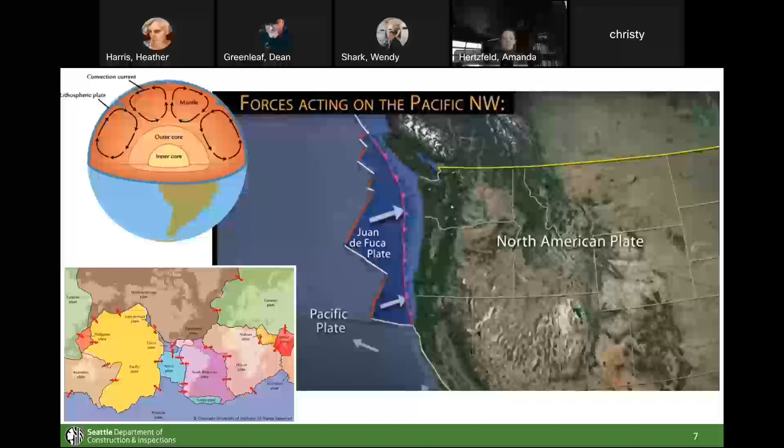And that being pushed underneath is what causes the subduction zone, that really big earthquake, the big one that they talk about. In that tectonic setting, you can have an earthquake happening right at that point of friction where those two plates are coming together. That's your megathrust event, the Cascadia subduction zone scenario.

Just really quickly, those megathrust earthquakes, the Cascadia scenario, the big one, we have between a 10 and 33% chance of experiencing that earthquake in the next 50 years. So relatively low probability, but we also know it can happen.

The last earthquake happened in 1700 on that fault source, and we know that those earthquakes happen between every 250 and 500 years. So it could happen this afternoon, or it could happen 150 years from now. The point being, we have a lot of geologic evidence that says it will happen again, and it's really important that we take appropriate measures to be ready for when that does happen.

The Nisqually earthquake was a deep earthquake, happening on the part that's more subducting, that is lower. We have an 86% chance of that happening in the next 50 years, so that's a really high probability. We want to make sure that our buildings in the city are ready for shaking associated with that type of event, because it's very likely that will happen again in the near future.

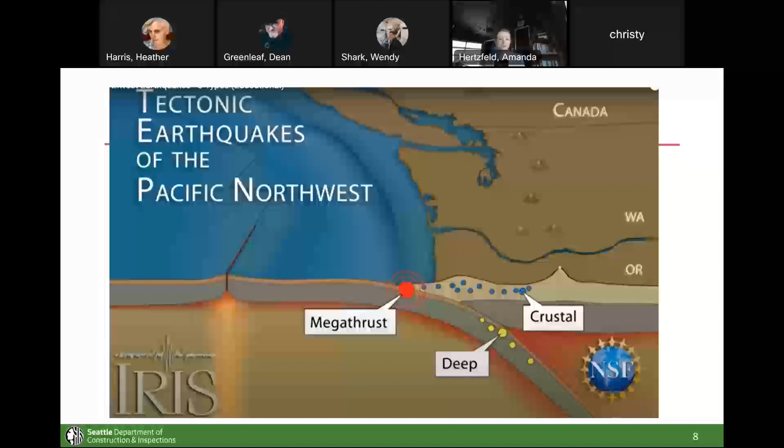I wanted to spend just a moment and talk about the difference between magnitude versus intensity. A lot of times you'll hear people talk about the Cascadia event as a magnitude 9.1 or 9.2. The Japan Tohoku event that created the big tsunami was also a magnitude 9 earthquake. Our Seattle fault, our Nisqually earthquake, I'm talking about lots of different earthquakes here. The Nisqually earthquake was, I want to say, a magnitude 6.8. The difference between magnitude and what you see here, Mercalli, that's the intensity scale: magnitude is the amount of energy being released, and there's only one number for that. So Nisqually was a 6.8 magnitude earthquake, but that intensity is felt differently, dependent on your proximity to where that epicenter or that earthquake started from.

For example, a magnitude 9 Cascadia earthquake is a very high magnitude earthquake, but the farther you are away from that fault zone, the less intensity that earthquake is going to have.

And Dean, I see you have a question. Yeah, I was just wondering, recently there was the earthquake in Turkey. Did that have a specific magnitude given to it?

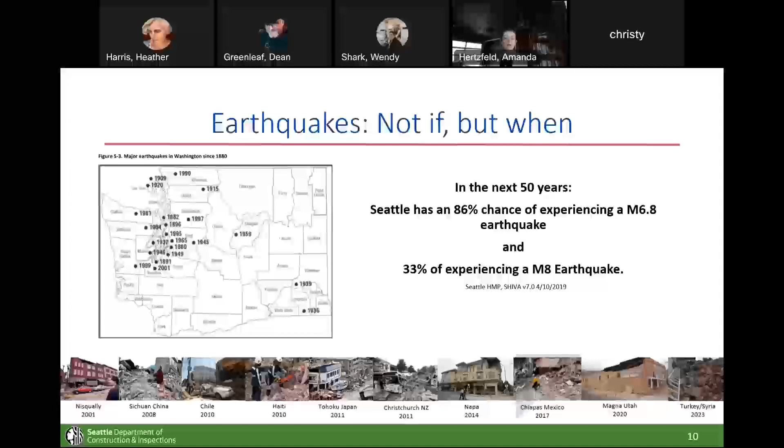But first, I wanted to reiterate: we have a very high earthquake risk in the Pacific Northwest. We cannot predict when an earthquake will happen, but we can warn in advance. The intensity of an earthquake changes based on your proximity to that epicenter. There's a new warning system in place that can give you around 10 seconds of warning. That system works because there are monitors all over the state, and when they sense an earthquake, so earthquakes happen in two types of waves: the first is called the primary wave or P wave, and that wave travels faster than the secondary waves, which are stronger in shaking.

Because radio essentially can travel faster than earthquake waves, these sensors can sense the earthquake and send a warning to your phone telling you there's an earthquake coming: be prepared, drop, cover, and hold on. If you're interested in downloading this app, it gives you around 10 seconds of warning, depending on where the earthquake source is coming from. If it's a Cascadia earthquake, you'll get around 10 seconds, maybe even a little longer. The app is called MyShake. It says it's through Berkeley, but they're just the ones running the app. So you can download MyShake on your phone and get early warning.

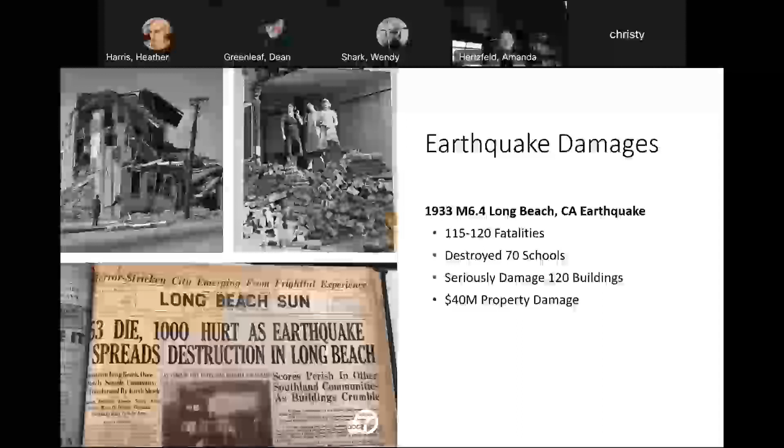You can see the group of women standing on top of a pile of bricks. This earthquake is really when we learned that unreinforced brick buildings — brick buildings without any reinforcing steel — perform really poorly in earthquakes. Here's a picture from our 2001 Nisqually earthquake. You can see this building — the brick really crumbled down into the street. So if you were inside this building and decided there's an earthquake, I'm going to run outside, you would have been absolutely pummeled by the bricks falling off of this building.

The best course of action is really to stay inside the building, drop cover and hold on. You can see the people standing on their car — their car had been covered in bricks and not much of that car is left. So we know these unreinforced masonry buildings perform very poorly in earthquakes. There were no fatalities associated with these buildings in this event, which is very good, but there could have been. Had you been standing on the street right here, you could have died, or definitely been significantly injured.

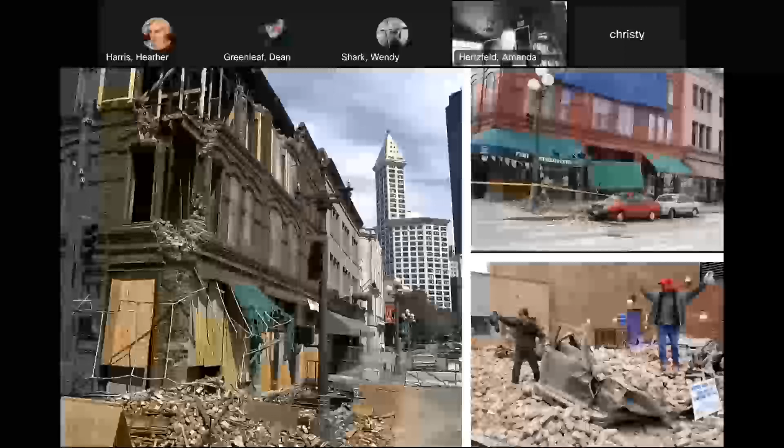After the earthquake in New Zealand, they had many fatalities from unreinforced masonry buildings. They had to shut down almost their entire downtown area for multiple years to demolish buildings and figure out rebuilding strategies. They also created two new landfills, called Rubble Mountain, from having to demolish so many buildings and remove debris, in addition to the economic impacts and the trauma of losing lives and injuries from this earthquake.

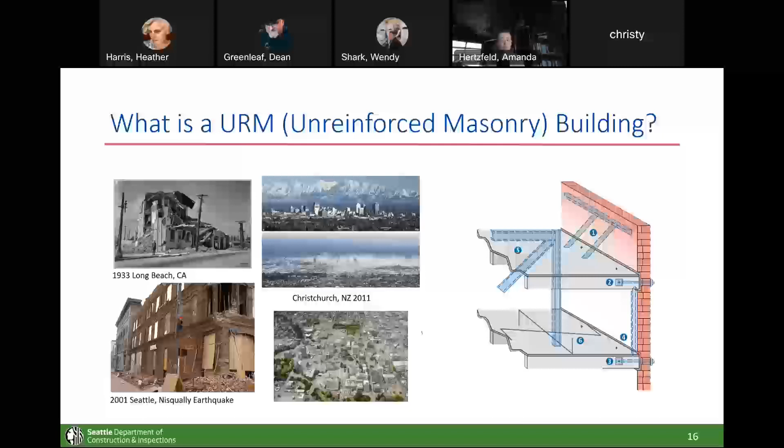So unreinforced masonry buildings are a significant vulnerability in our city to earthquakes. However, we know how to fix this problem through engineering. This graphic shows an unreinforced masonry wall, and the dotted lines represent reinforcements we can add. You can brace the walls to prevent them from moving out of plane, bolt the floors to the wall to prevent them from falling, and add additional structural frame support.

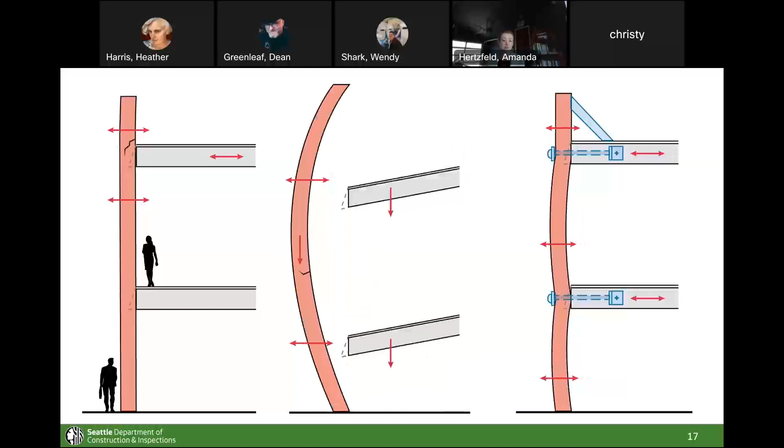In the third graphic, you can see that by bracing the parapet and connecting the roof to the walls and the floors to the walls, you can prevent that collapse hazard in the building. The building is still vulnerable to shaking and you'll likely still have damage, but the collapse of the building and potential loss of life is significantly reduced.

Before I go further, I wanted to point out we have a ton of brick buildings in Seattle. That's largely because after the Seattle fire in 1889, the mayor called together businessmen from the city and passed an ordinance that buildings needed to be made of fireproof materials. And you know what's really fireproof? Brick. So we rebuilt our city after the Great Seattle Fire with brick buildings—really great for one hazard, but not the most resilient thinking when it comes to others.

And obviously this was before—oh, and you know, this should say 1889, not 1989. I think that is the date of the fire. Yeah, I was just looking at that going, no, I think it was a little earlier. I think I need to change that slide. But good catch.

So this fire happened before the 1933 earthquake in California, where we really learned how bad bricks are in earthquakes. There hadn't been a lot of earthquakes during the time of white settlers in Seattle, so we weren't as aware of our earthquake hazard.

Additionally, the science of earthquakes is still relatively young. While we knew earthquakes could happen, the actual theory of plate tectonics—one plate subducting under another—wasn't widely accepted in the scientific community until the 1960s. We didn't really know about our Cascadia subduction zone until the mid-1980s. So when it comes to addressing URMs, we're still catching up to the science of understanding our geologic risk in the area.

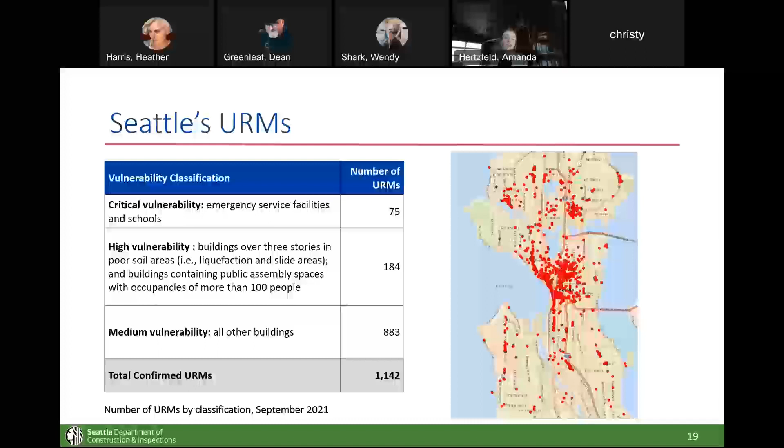If you are interested in learning what these buildings are, you can go to the SDCI website. If you Google SDCI URM buildings, you'll be taken to this page, and under project documents, you can scroll down to the URM list. You can pull that up in a spatial viewer like a map, or see a PDF document of all the buildings and read more about what these buildings are and what the methodology was in identifying them.

Since the Nisqually earthquake, Seattle has been actively trying to understand our vulnerability and forge a pathway forward in trying to repair or seismically retrofit these buildings. It is a really complicated issue.

After Nisqually, we had multiple engineers go out and try to understand where these buildings are. The city also had a hired engineer that helped develop our inventory of URM buildings. We developed a policy committee of folks to go through and understand the implications of asking people to retrofit these buildings. This is an expensive ask for building owners. How do we decide what is the minimum level of retrofit that we should require?

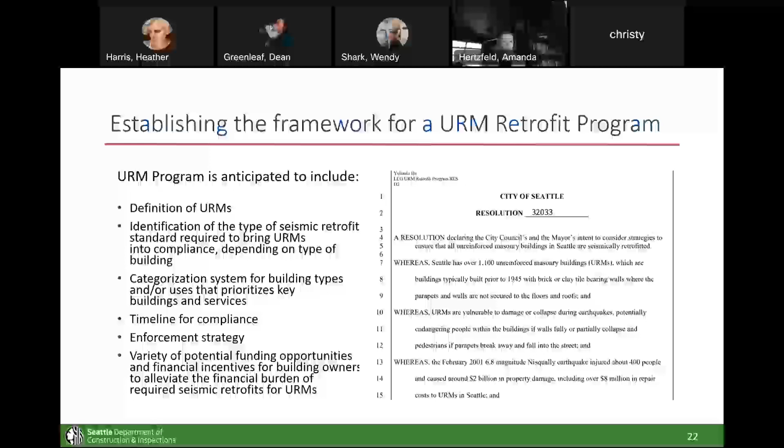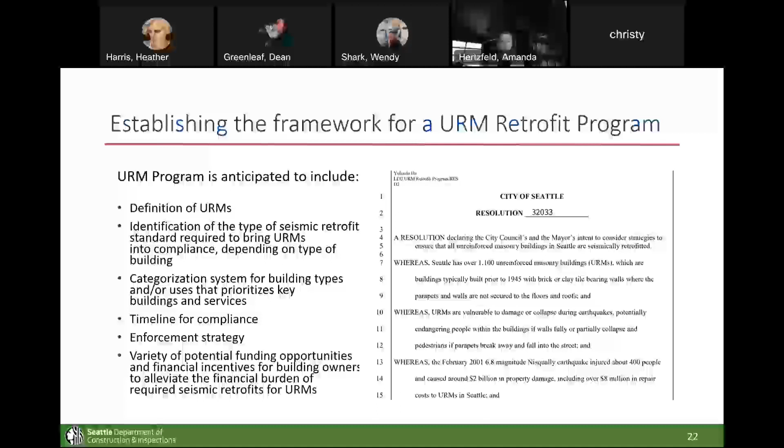It also asks us to develop a variety of funding opportunities and financial incentives for building owners to alleviate or reduce the expense associated with the retrofit. We are currently working on this, but there's a few things I wanted to highlight.

One is that the primary goal of this ordinance is to protect life safety by preventing the building from collapsing. That is different from having a building that is fully functional after an earthquake. A retrofitted building should still anticipate damage in an earthquake. That damage just won't be such that it will collapse on you. It's purely to reduce deaths in an earthquake.

There are opportunities for building owners to retrofit to higher standards so their building experiences less damage and is more functional, but it is more expensive and more complicated to do that. From an equity standpoint, the city is looking to reduce the burden on building owners and work on specific life safety requirements.

There are additional goals of this ordinance. One is we do want to preserve our culturally significant landmarks and historic structures. URM buildings are old buildings - we generally don't see many of them built after 1945. But these are old buildings, and we don't want to just knock down everything old in the city.

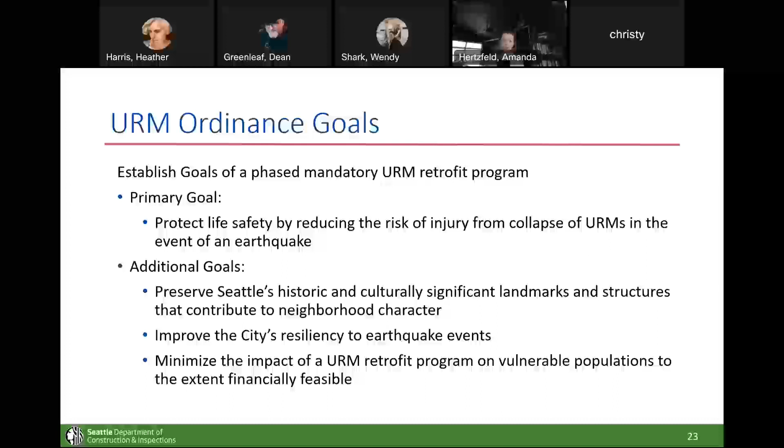A lot of these buildings, because they're so old and have not necessarily been modernized, tend to be naturally occurring affordable housing. The city has some real problems right now with affordable housing and availability of housing. We don't want our efforts to improve the city's seismic safety to unintentionally result in a reduction in housing, especially affordable housing. So it is really a complex balance of affordable housing, historic preservation, and life safety as we move forward to figure this out.

Looking at our timeline, we are finishing right now what I'm calling our baseline retrofit standard, or our minimum level of seismic compliance. We'll be having some webinars in June to share what that means. That's really looking at the engineering specifics of how do you retrofit a URM building to reduce its collapse potential in an earthquake.

In 2024, next year, we are hoping to identify and have more communication with building owners and tenants about funding sources available, whether that is through low interest loans, potential grants, or even looking at transfer of development rights programs, where a building owner of a URM could potentially sell their development rights. Meaning, if they have a 3-story building right now but their parcel is zoned to be up to 6, they could sell the development rights for those 3 extra floors and use that funding to retrofit their building.

The soonest that we could adopt an ordinance right now would be summer of 2025. Previous policy recommendations to the city have suggested between 6 and 13 years for compliance, so that means a critical building would have around 6 years to retrofit, but medium buildings would have 13.

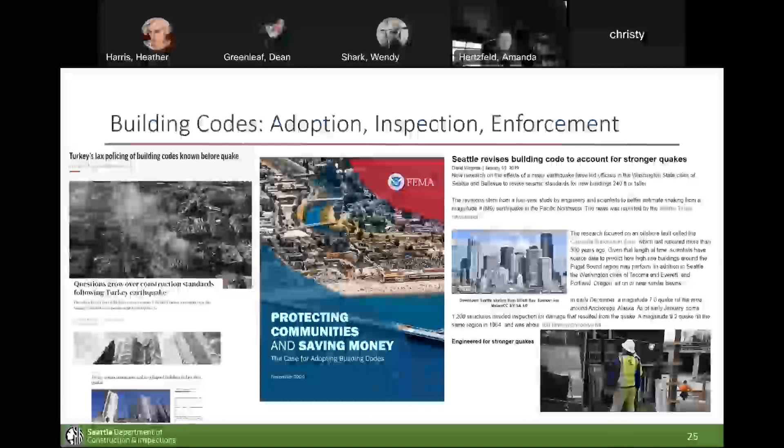Seattle is doing a really great job, both with adopting modern building codes and adapting to those. Looking at unreinforced masonry buildings, it's very challenging to bring an older building up to modern code, but you can retrofit to bring it up to at least a higher percentage of modern code.

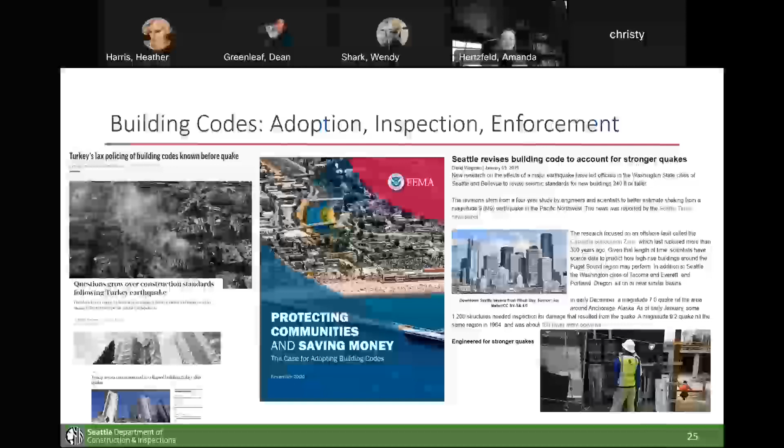So this is just a little bit of a shout out to all the building code inspectors and the people doing enforcement. It is a thankless job until there's an earthquake, and you see the buildings that stayed standing and protected the safety of their occupants and the people walking by.

So just a couple things as I wrap up here. Building codes are different than building performance.

Our building codes are generally designed to a life safety standard, a phrase I've used a few times here. What that means is that occupants are able to exit the building after an earthquake, but the building is expected to have considerable damage.

URMs right now are not on this scale. URM buildings are prone to collapse, and so looking at our retrofit program, we are primarily looking at collapse prevention. That being said, a URM building owner could do advanced engineering to bring that building up into higher standards to include life safety or even immediate occupancy.

There is a lot of talk in the building safety community about requiring future buildings to be more focused on operational capacity, meaning that after an earthquake the building would be just fine and operational and you could use it. That does add time and cost to the design.

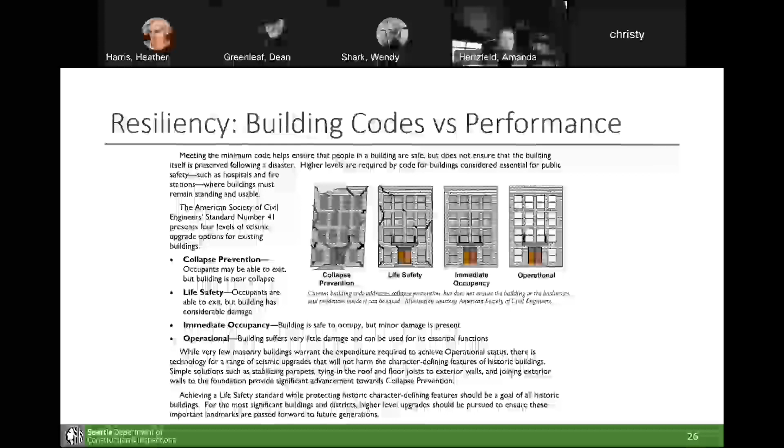If you're interested in learning more, I've got a number of links here that I will briefly walk through. But I first wanted to point out there's a really amazing book, I have a copy that I take everywhere with me. It's called The Big Ones by Dr. Lucy Jones. She's a seismologist based out of California, often referred to as the Beyonce of earthquakes, and you can't compete with that, right? She has an amazing Twitter presence and is full of information about earthquakes, as well as being a really strong advocate for building codes that are more focused on functional recovery of a building rather than life safety. It's a really good read too, not super technical, an enjoyable one.

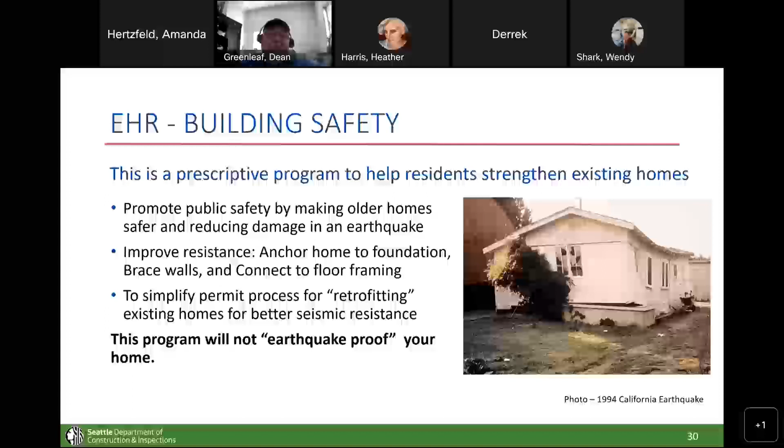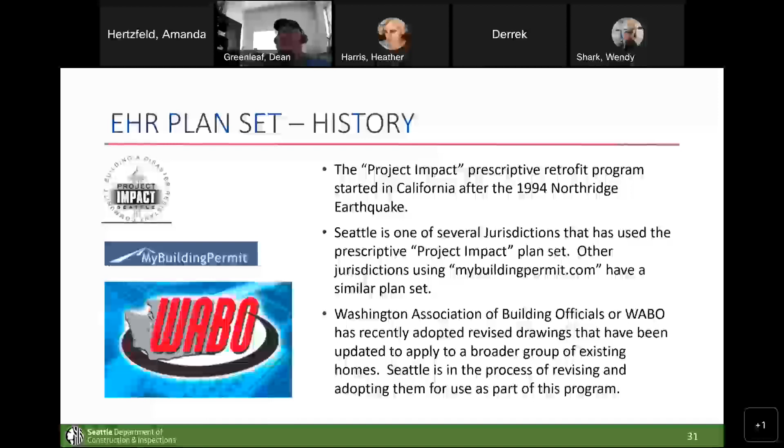The current EHR plan set is based off of the FEMA P1100 drawings, part of the Federal Emergency Management Agency. The full name of that plan set is the Vulnerability-Based Seismic Assessment and Retrofit of 1 and 2 Family Dwellings, which we really had a hard time calling it the VISAPAR 2 and 1, or 1 and 2. So we came up with EHR, or Earthquake Home Retrofit. The P1100 is fairly complex and meant to apply all over the country by FEMA.

The Washington Association of Building Officials, or WABO, brought that in and has simplified the plan set itself, making it as widely applicable as we can while staying within the parameters of that prescriptive plan set to be used here in Washington State.

Several jurisdictions do use this plan set. Project Impact was applicable mostly in Seattle. This new plan set is actually applicable in many jurisdictions and is already being used in Tacoma, Seattle, Mercer Island, Bellevue, Shoreline, and a couple others in several different areas. Many of these jurisdictions use mybuildingpermit.com, and it's all online.

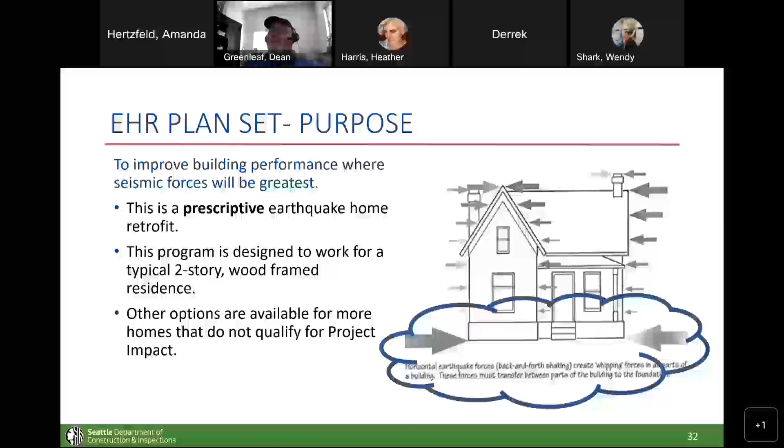So when you're looking to retrofit your home to better resist earthquake forces, these issues are great places to start. Look at the foundation, look at your connections between the home's first floor and the exterior wall and that foundation, and specifically look to brace that short wall between the foundation and the first floor, commonly called a pony wall or cripple wall. We will be using the phrase cripple wall in this presentation today.

This picture is from the San Fernando earthquake. The building has a small stucco exterior, but it's wood framed. That wood framing has come off the foundation. You can see the sill plate is now entirely sitting on the foundation by itself with no structure above it.

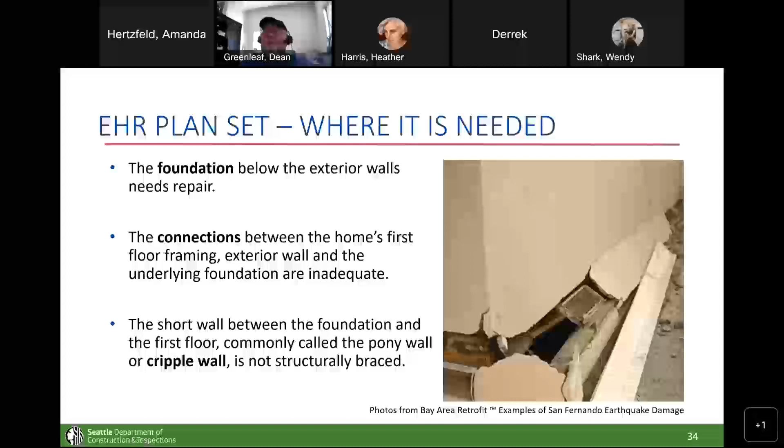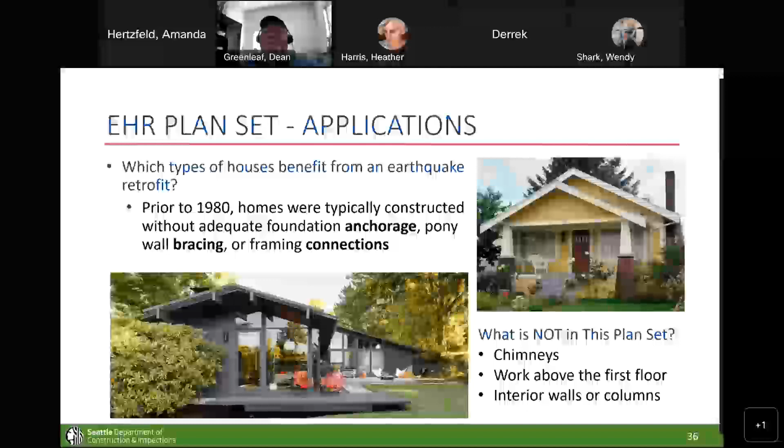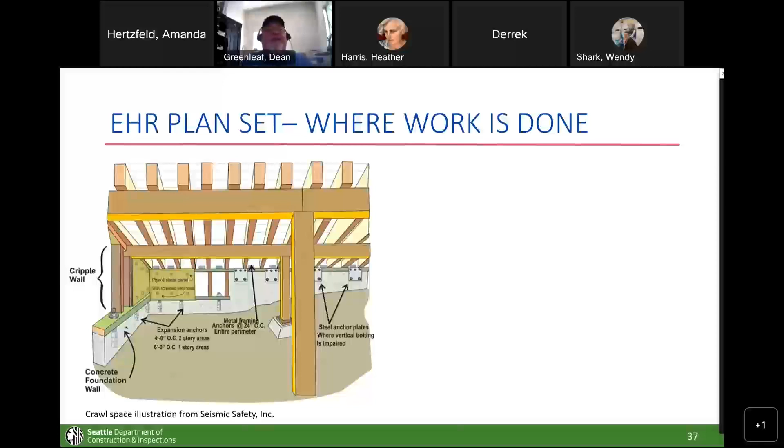The prescriptive plan set looks at specific areas around the home's perimeter, looking for specific characteristics. We're looking for a basement or crawl space. The EHR plan set is not something that works really well with a slab on grade or with a building that doesn't have a concrete foundation.

The EHR plan set is limited to 1 or 2-story buildings above a basement, measured above the first framed floor. The square footage is limited to 2,000 square feet for a single family home, or 3,000 square feet for a single family home with 2 stories. It's fairly broad, especially for older houses, but a modern house or a very large house would exceed what's covered under this prescriptive plan set.

Wall and roof finishes can be brought up. Some things will make the building heavier, and it will react differently in an earthquake—brick veneer on the outside, tile roofs on the roof. Stucco can work, but if it's a brick building or if there are tile roofs, that could create an issue.

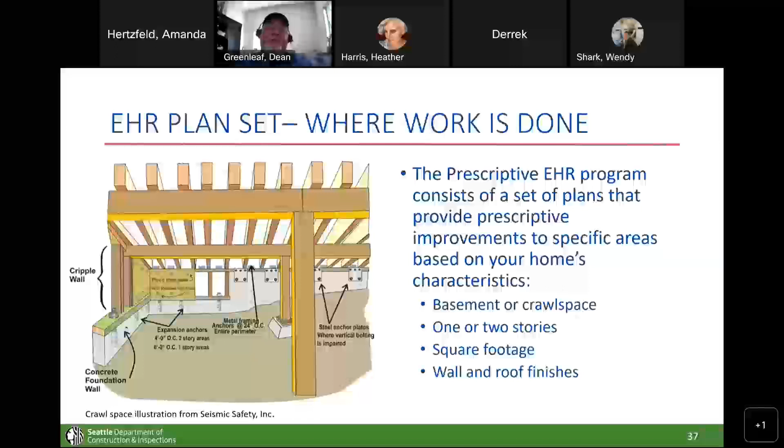Back to those ABCs: anchor, brace, and connect. The detail on the left shows what we call anchor bolts—probably one of the most common ways current buildings are anchored to the foundation. Those bolts are often set when the foundation is poured. In a retrofit, they are typically drilled in, or side plates are used, but those are mechanically anchored or anchored through use of chemical epoxies and stuff like that.

When we talk about bracing, a lot of times they'll put up oriented strand board or plywood. The bracing is shown here as the lighter tan where it says ventilation holes, and that is to stiffen that lower wall.

Then to connect to the framing—that is to connect to the first floor framing—this is often called a hurricane clip or joist clip, and it goes between the vertical wall framing and the first floor framing to help get a better connection and transfer forces through it.

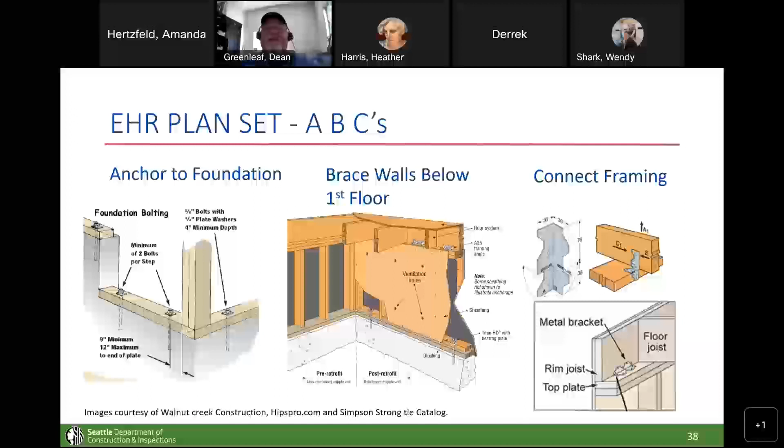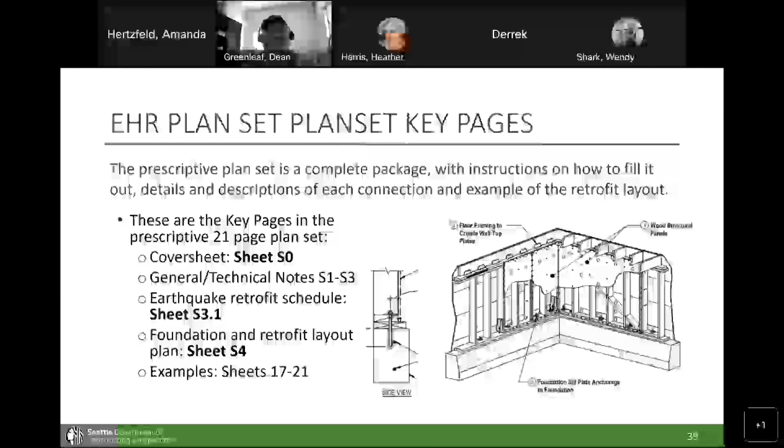The main part of the project impact is showing how that anchor, bracing, and connection is done to a single family home. It is a complete package—you can't submit one detail or two details. You also need to retrofit the whole existing basement or the whole crawl space. But each of these have different impacts, and different parts of it are important.

The key pages I'm going to talk about today, just to make you a little familiar with it, are the cover sheet, or sheet S0, the earthquake retrofit schedule, which is sheet S3.1—there's one for 1-story dwellings and one for 2-story dwellings—and then sheet S4, the retrofit foundation and retrofit layout.

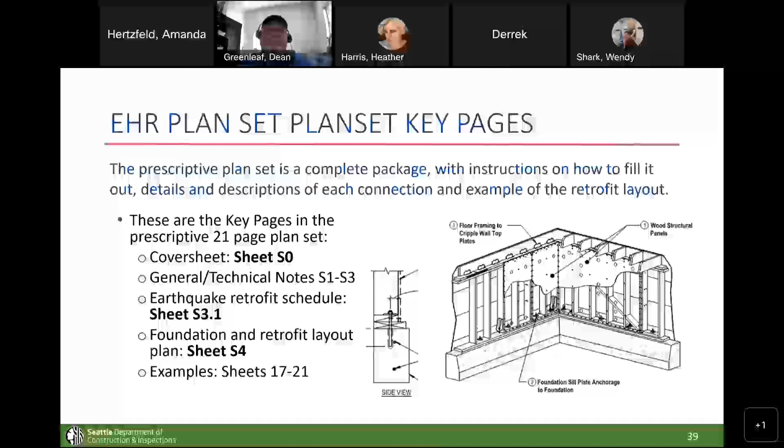The sheet S0, or cover sheet, is probably the most important when you're screening or trying to figure out if you can use this plan set or not. There are 11 qualifying questions—you can either be compliant or non-compliant for each one. If any of these are shown as non-compliant, you probably cannot use this prescriptive plan set.

I'm going to go through each one of these, but probably one of the most important is that the dwelling is a wood, light frame dwelling that is 2 stories or less in height—item number 2. The dwelling has a crawl space or basement, and the perimeter is supported on cripple walls, foundation stem walls, or a retrofitted system brought up to foundation stem walls.

Without a foundation to connect to, this plan set really doesn't work. This can also be an issue on steep slopes, where the slope is close to 30% from one end to another, or if it has heavy roof or heavy wall materials.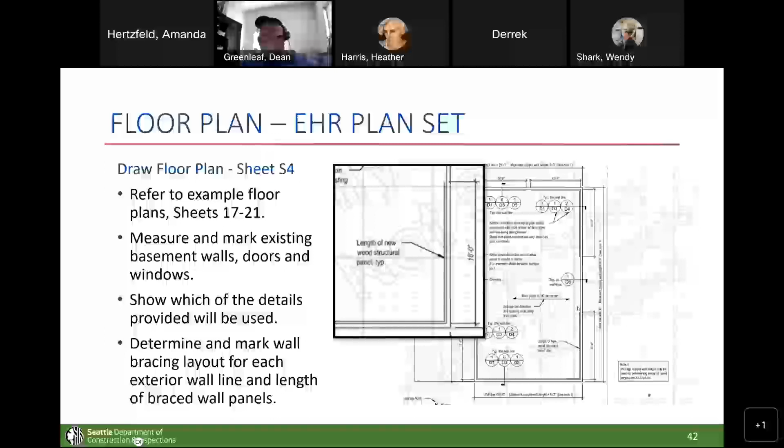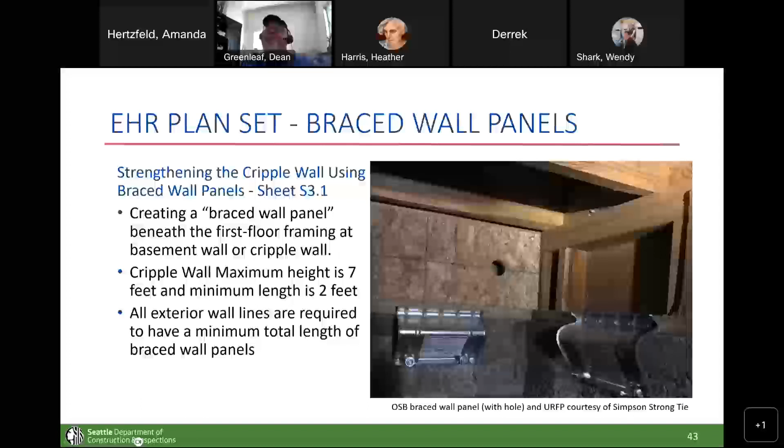So the last page in this earthquake home retrofit plan set, the one that shows how much and how many braced wall panels you need, what's the total length, the number of anchors, and the number of connections to that sill or the framing, is shown in what they call the earthquake home retrofit schedule.

So this was originally set up for 2 braced wall lengths, and it had multiple pages based on a different design response for 1 and 2 story heavy and light construction. The WABO plan set that we're using, the one on our website, has 2 versions: 1 for a single story and 1 for a 2-story condition.

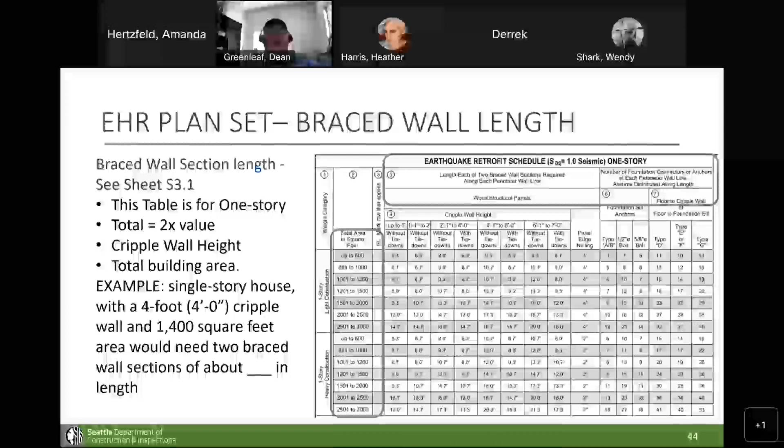So the most important thing is to start off knowing whether you're on the single story or the 2-story condition, and then looking at the total area or square footage. This would be the total area from that first framed floor, not including the basement, and then the second floor above that if present. This would not include decks, and would not include a slab on grade garage. This is for the retrofitted part of the home.

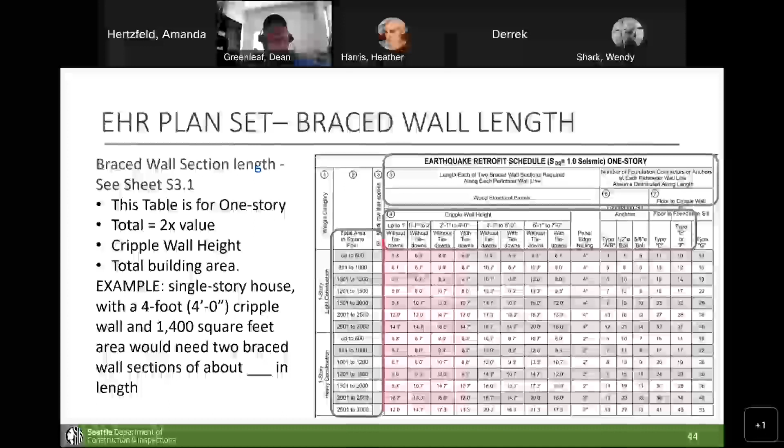The other factor is the cripple wall height. You'll notice there's a scale, or a variety: 2 to 4 feet, 4 to 6 feet, and 6 to 7 feet. If there's no cripple wall height, you can enter 0. For anything between 0 and 1, or 1 and 2, you'll notice they cannot put in tie downs. You would have to use side anchors, and can't use tie downs on either end.

So for example, let's say we have a 4-foot wall and 1,400 square feet of area. On the left is the 1-story condition, single-story house, 1,400 square feet, which falls between 1,201 and 1,500. The 4-foot wall would be between 2'1" and 4'0". So going from the row and column, looking at a cripple wall, the amount of each of the 2 braced wall panel sections would be either 10.7 or 8 feet.

This would show the length of one of those panels. The total number of panels, or the total length of braced wall panels along each exterior wall - north, south, east, or west - would be either 16 feet or 21.4 feet, 21 feet 4 inches. I had to figure that out.

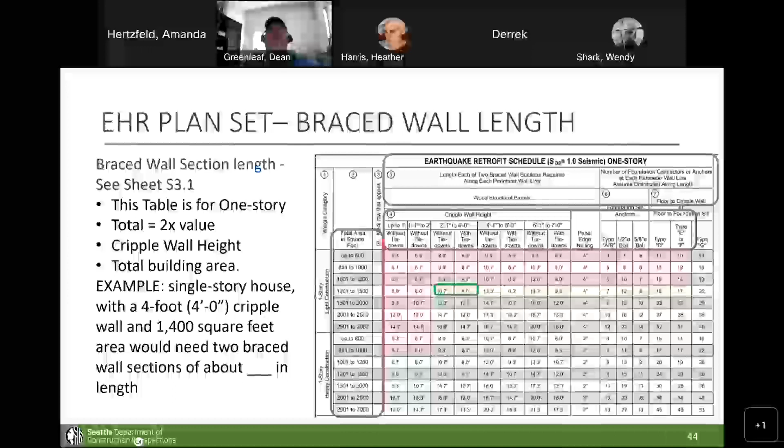This plan review is expedited, and the fees for this are based on about 1 hour of time versus the actual valuation of the project. So there will be plan review, there may be corrections, but the idea is to submit it for screening, have the project brought in and reviewed, and then have inspections.

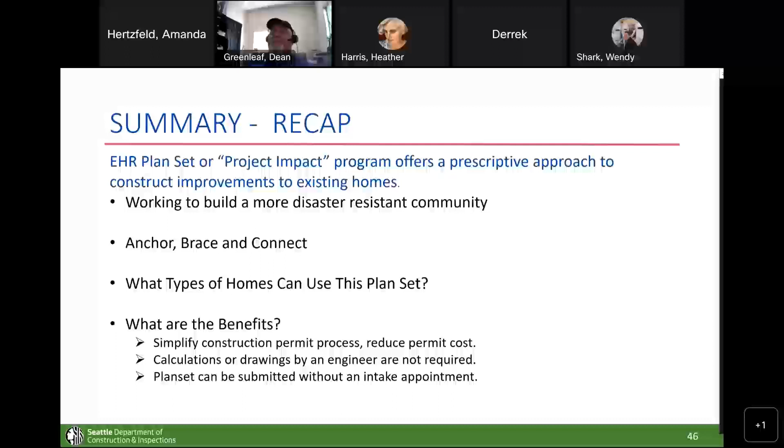Our chat service is Monday through Friday. Look for the blue circle with the chat box in it, or go to the ASC virtual counter, and you can either chat with somebody live or submit a question. This is a new service we're really proud of, and it can save you a trip downtown.

Thank you very much for your time, and thank you very much for logging in and taking a look at this. Look forward to helping you in making Seattle a more strong and resilient city.